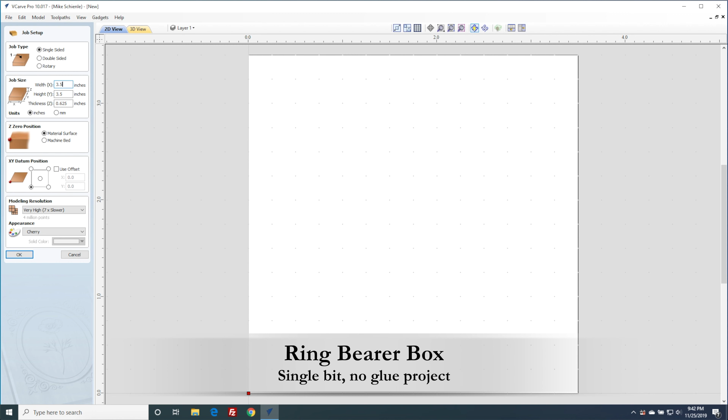So I've got a simple little project here called a ring bearer box. My wife is a minister and basically I get asked to do projects for weddings all the time. So this is a real simple one. It's a single bit. There's no joinery to speak of. Basically the hinges are the only joints that we're using and we're drilling holes for them, not anything else.

So we're setting up the window to be 3.5 inches by 3.5 inches here and 5/8 of an inch thick. Now we're going to go pick out a heart from the 2D vectors section here. And it's on the next window below. Here we go. Just drag it in, double click, whatever you prefer. And it's kind of oversized, so you have to grow the window and zoom back down to it.

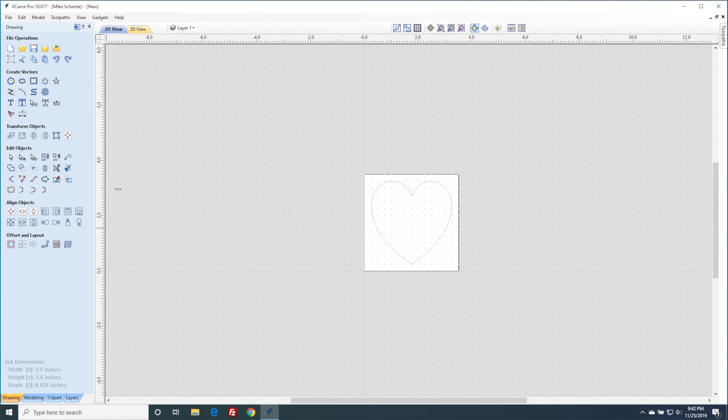We're going to go ahead and select the heart, resize it to 3 inches. That gives us about 1/4 of an inch all the way around of our 3.5 inch box here. Okay, so next we're going to put in a couple circles.

Before we draw the circles, let's take a look at the hinges that we're going to be putting into these circles. They're made by Soss, S-O-S-S, and are beautiful brass hinges that go great with curved areas like the lobes of our heart box. As we show the next screen, you'll see the smallest size is 8.2 millimeters, or about 1/3 of an inch, which is plenty strong enough for this box.

However, the design of the 8.2 millimeter uses a pair of external set screws, whereas the 10 millimeter uses a single internal set screw. That difference makes the 10 millimeter a much better choice overall. So let's focus on part number BH104 and look at column A for the diameter of the hinge. For those that aren't comfortable with metric, just think that they're roughly 25 millimeters to an inch.

And since we're going with a 10 millimeter hinge, that's 2/5 of an inch, or 0.4 inches. It actually converts to 0.39 inches to be exact. So column B is a depth, which is 11.5 millimeters, or 0.45 inches. And the last column we need is E, which is the gap needed between the two pieces of wood for the hinge to operate correctly.

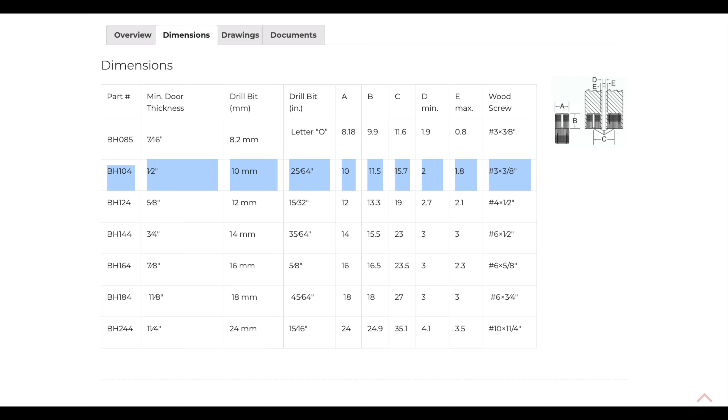In this case, we need a gap of 1.8 millimeters, or 0.071 inches, from the edge of the barrel hinge to the edge of the wood. The gap can be narrower without causing any real issue, but any wider and the hinges cannot open because the wood cannot slide past, preventing the hinge from moving.

So here's a quick engineering diagram that comes with the hinges. You can see on the far right is where our 10 millimeter dimension comes from. If you look in the middle, you'll see the 11.5 millimeter depth. And at the far left, you'll see the 1.8 millimeter offset that we talked about. And while we're looking at this engineering diagram, let's talk about a couple fudge factors I have to apply here.

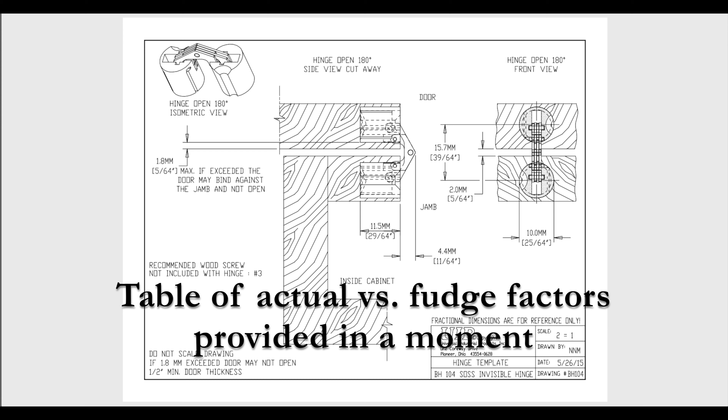So the 0.39 inches for the circle diameter at 0.45 inches deep and an offset from the edge of 0.071 inches. However, if I drilled or pocketed a hole at 0.39 inches diameter, the hinges cannot be pressed into the wood. For my particular CNC, the best fit is when I set the hole diameter to 0.413 inches. And yes, that last 3 in 0.413 does make enough of a difference that it is worth using. That results in a tight-fitting hinge that can be pressed in with moderate finger pressure and extracted without tools.

As mentioned previously, the hinges tighten with a small Phillips set screw, and I haven't had one loosen since I started using them in 2018. We'll fudge the depth a little bit from 0.45 to 0.475 to accommodate the stray speck of sawdust, as well as give us a tiny bit of adjustment if we need to close a gap between the wood for whatever reason. And back to that clearance gap of 1.8 millimeters, or 0.071 inches, to the edge to allow the box to open correctly.

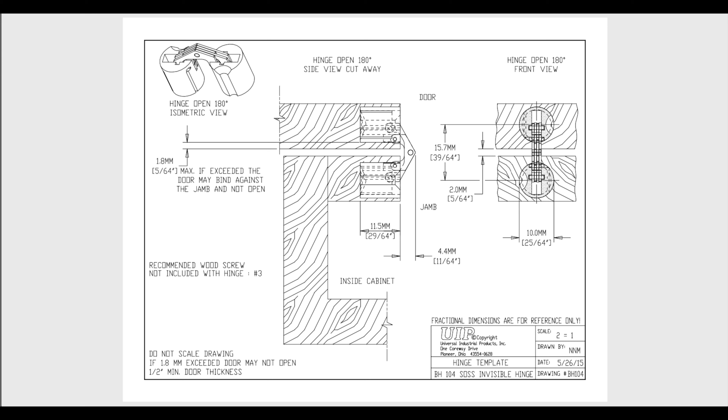The simplest way to make this offset is with another circle around the circle for the hinge. Our hinge circle has a diameter of 0.413 inches instead of 0.39 inches, and we need to add 0.071 inches to the radius to allow our hinge to operate correctly. Notice I mixed diameter and radius—so we actually need a circle with a diameter of 0.413 plus 2 times 0.071, which is 0.555 inches. Again, the little fudge factor for a great fit is to add 4 thousandths to this for a circle diameter of 0.559 inches. This is all just from using them, not any specific math being applied. Sorry to throw that at you, it's just how it works best.

Back to the drawing of our heart here. We're going to draw the 2 circles that we need. The first one is 0.413 inches for the diameter of the barrel hinge, and the second one is going to be 0.559 inches for the offset to the edge of the heart.

Now that we've created these 2 circles, we're going to group them and then align them with the very top of the heart, right up at the lobe. We'll move those by selecting both and then hitting the correct function to align them. Then we need to zoom in and actually move the circle into the direct spot of the highest part of the lobe. It's a little tough to describe.

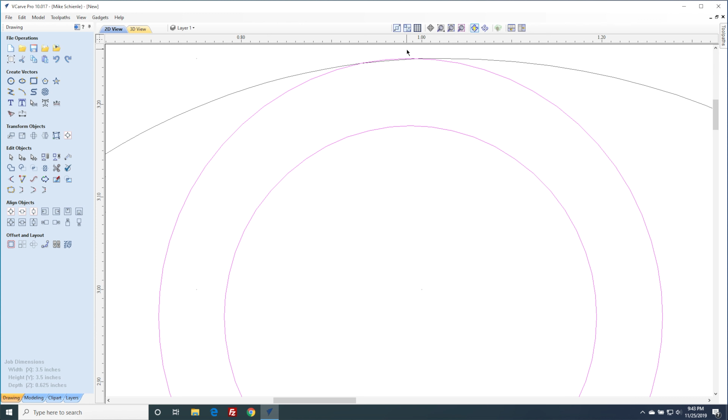You kind of have to just visually watch what's going on here. I've actually picked the center part of the lobe just by moving the cursor to it, and then I move the circle to the middle of that cursor. Again, kind of a painful thing, but it's not too bad once you figure out how to do it.

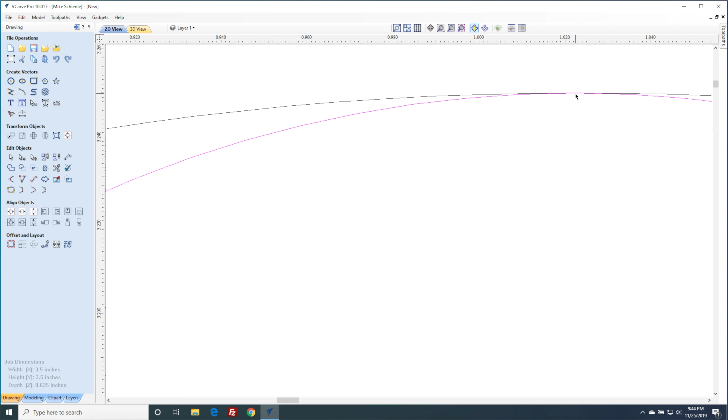Now that we have it precisely aligned, all we need to do is zoom out, look at the entire heart, pick the circle, and then mirror it to the opposite side. We want to mirror that around the center of the heart. So there we go—that's all we need to do for the drawing of this entire thing.

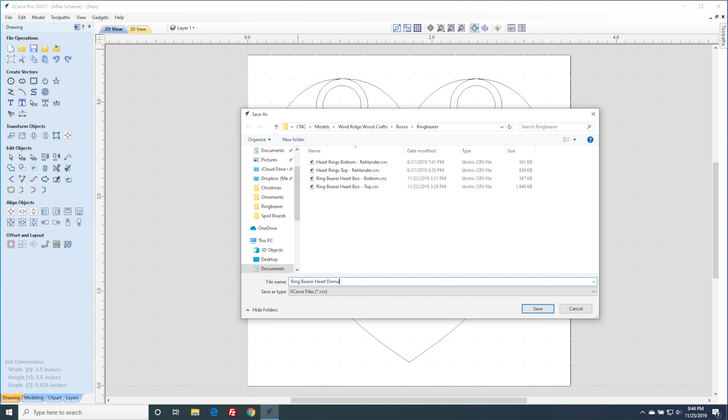The rest of it is all just done in the toolpaths. We're going to ungroup the circles and move over to the toolpaths. First we'll go ahead and save the file off since we're done with one phase of it. Once we're over in the toolpaths, all we need to do is select the two inner circles for our barrel hinges, open up the pocket toolpath, and set the depth to 0.475 inches, which is our little offset beyond the 0.45 inches.

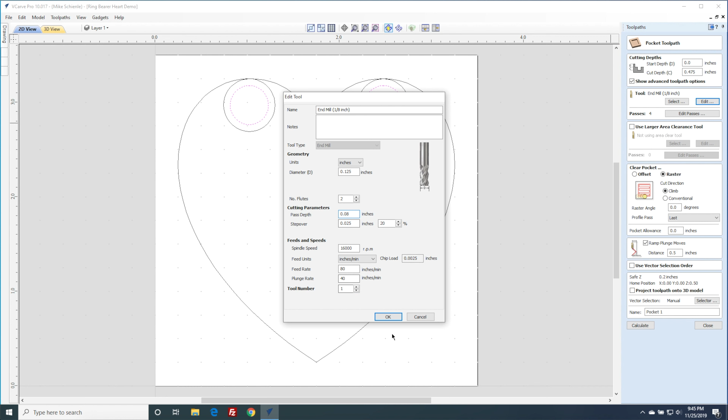Now we're just going to go ahead and change a couple of settings on the tools. We're going to set the depth to 0.08 and give it a new name. Then we'll go up and change to offset, and then we'll change the distance of the ramp and plunge.

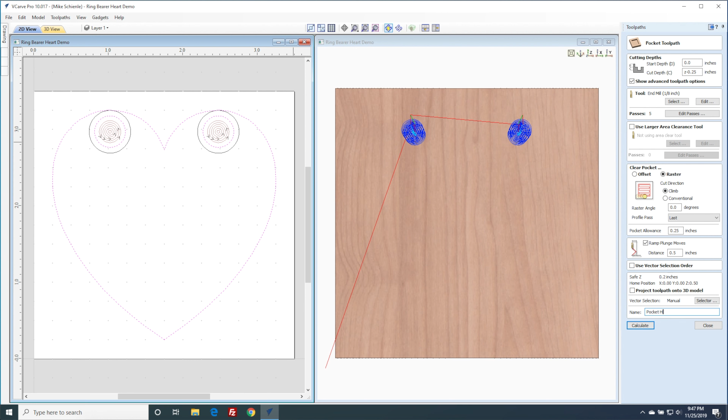Now we're going to go ahead and set the depth of the heart portion of the box. We've already got the barrel hinges selected. Now we're selecting the heart, and we're going to set the depth of that—it's going to go to Z minus 0.25 inches. Basically, we're leaving a quarter of an inch at the bottom of the box, and this setting is to keep a quarter of an inch around the edge of the box. Give it a quick name, calculate.

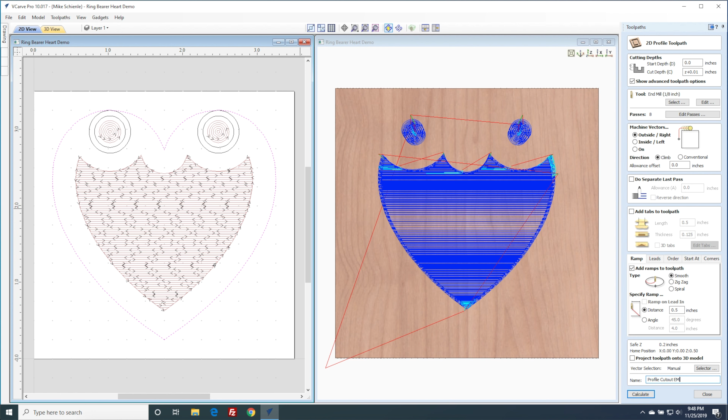Close that off, and now we're going to go ahead and cut out the box. We've selected the heart, we're going to do a profile, change the depth to Z plus 0.01 inches, and put a ramp on it. We'll go ahead and give the toolpath a name, save that off, and respond to the depth notification.

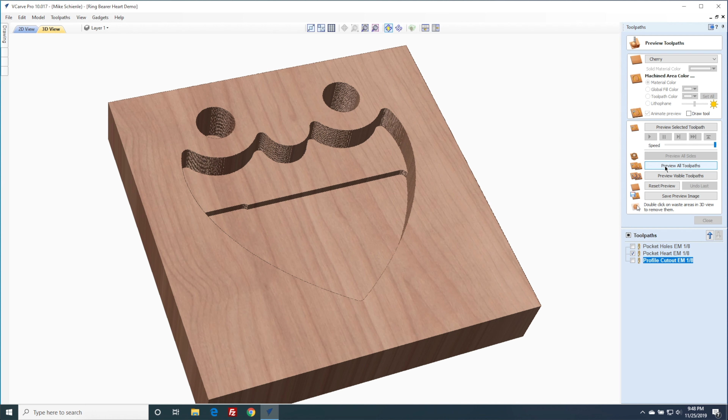Then resize the window and preview it. We'll go ahead and set it to ISO view and take a look—here comes the hinges and the heart and then the cutout. Alright, all looks good. Give a quick little twist here and I think we're all done. Thanks for watching, guys, appreciate the time.